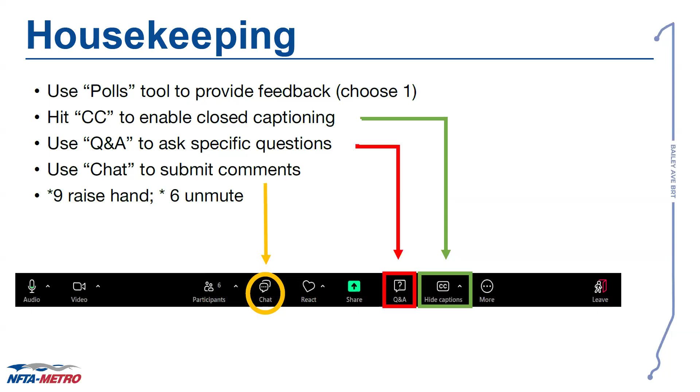So the first thing we have is our first poll: have you been engaged by NFTA about the Bailey Avenue Bus Rapid Transit project before? Below you can see the options. Yes, I received a mailing. Yes, I met an ambassador. Yes, I attended an open house in February. Yes, I heard NFTA present at a community meeting. Yes, I went to the event on June 11th. Yes, more than one of the above. And no, this is my first interaction related to Bailey Avenue BRT.

And we will post that right now. Is everybody seeing it on their screen? Great. In a minute, we will end the poll and give you a little bit to respond. So far, we have 3 people responding. So we ask that you take a look up on your screen and click the most likely option.

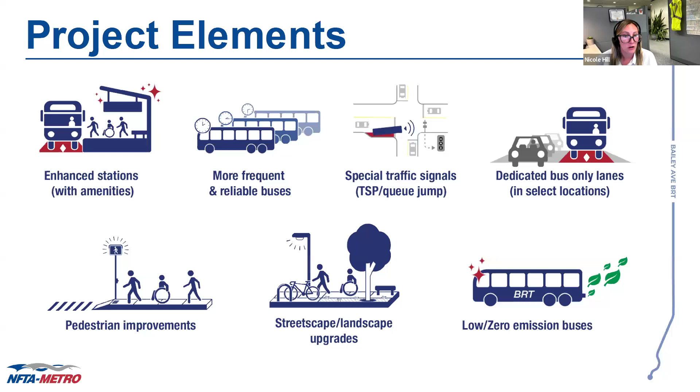The Bailey Avenue Bus Rapid Transit Project and the associated improvements to sidewalks, traffic signals, and the roadway will provide better transit service and repair public infrastructure in ways that will support further investment in the communities along the corridor. Next slide, please.

Over the past year, the NFTA and the team of consultants have conducted the final steps in the planning process before we can begin engineering for the project. Here's a brief overview of what we did, which includes these prior studies. So these prior studies were done previously before this project was built out.

These efforts included Buffalo Billion's East Side Corridor Economic Development Fund by Empire State Development, the Bailey Avenue Corridor Improvement Study, the City of Buffalo's Build Back Bailey project, and the GBNRTC's Moving Forward 2050 update, which serves as the region's metropolitan transportation plan. These studies generally focus on developing solutions to address disinvestment and improve transportation in and around Buffalo's east side. The results and outcomes of these studies have helped inform the Bailey Avenue Bus Rapid Transit project. Next slide, please.

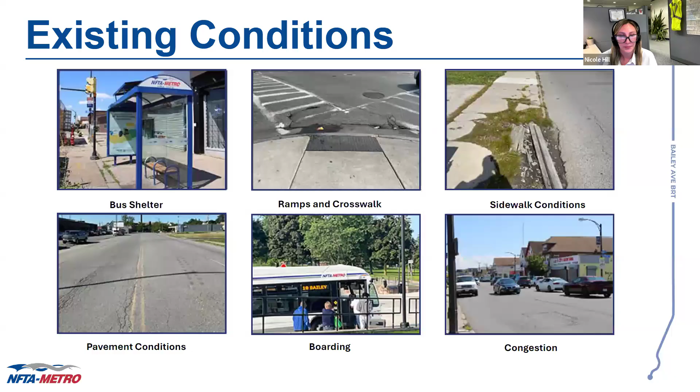Our team couldn't just rely on the work of others, therefore, existing physical and operational conditions throughout the corridor were assessed as part of this project. Elements like sidewalks, bus facilities, curb ramps, crosswalks, congestion, sidewalk, and pavement condition were cataloged and analyzed to better understand the needs within Bailey Avenue and the study area and what improvements were needed in the corridor. Here are some example pictures of some of the existing conditions along Bailey Avenue. Next slide, please.

In addition to this prior planning work, the NFTA project team conducted some other analysis to confirm some of the assumptions from those prior studies. This included a crash analysis to identify intersections with higher numbers of crashes, traffic analysis to make sure that improvements would make the buses faster without having too great of an impact on congestion, a ridership analysis to make sure that BRT stations are going at the right locations, and a special analysis to determine how much energy is needed to charge the buses and what that would mean to the schedules.

The results of these analyses and meetings were critical in advancing the project, including informing the conceptual design of BRT stations. The project team used special traffic models to analyze these impacts with the proposed new lane geometry, which would be needed to implement the BRT service. The team looked at all vehicles and bus travel in both the northbound and southbound direction at AM and PM peaks.

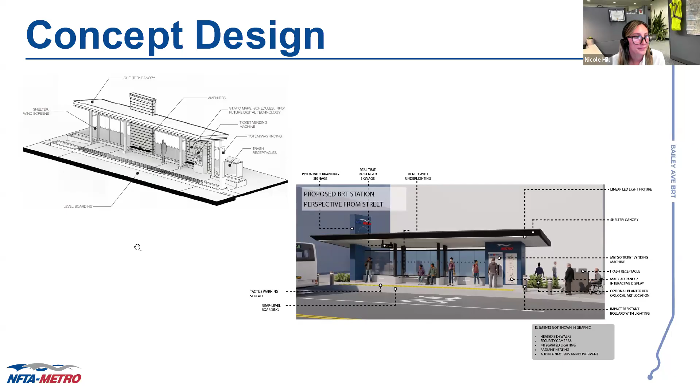Engagement is one of the most important parts of this project. The NFTA is dedicated to ensuring that everyone has the opportunity to be part of this project, especially those who may have been excluded in previous efforts. NFTA created a public participation plan to help guide all aspects of engagement and community involvement.

The public participation plan is used to target different types of engagement activities, which include meetings with stakeholder groups, tablings, attending community events, and developing various digitalized materials, which you can see on our website if you would like to visit that. The project team has been working on engagement efforts since the summer of 2024, including a variety of in-person activities. This includes over 40 tabling and pop-up events, 15 community meetings, and 6 key stakeholder groups.

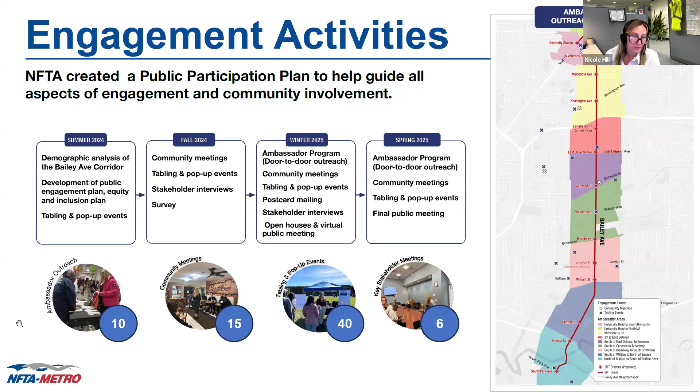NFTA previously launched an online survey towards the end of last year. The purpose of the survey was to assess community needs and desires related to the Bailey Avenue BRT project. The top 3 improvements for Bailey Avenue identified by survey respondents were faster buses, calmer traffic, and more buses.

After analyzing all of this survey data, the 4 major themes found were that community members wanted greater bus frequency, a safer corridor, infrastructure improvements, and improvements to the cleanliness and comfort. The results from this survey were used to inform the conceptual design of the Bailey Avenue Bus Rapid Transit project and reaffirmed that the community desires identified in past studies were still being felt. Next slide, please.

Hi, everyone. Again, I'm Nadine Chalmers. I'm the manager of planning here at NFTA, and I'm going to go through the next 10 or so slides that define the Bailey Avenue Bus Rapid Transit project going forward. So the purpose of all that review and analysis and engagement that Nicole talked about was to define the project, right? What does BRT on Bailey Avenue mean? What does it look like? And that's exactly what we've done over the past year or so is define the project.

After today's meeting, and after we receive comments by July 7th, we will be moving into the next phase of the project, which is engineering. And in the engineering phase, basically what we do is we fill in all the details required to construct and run this service. So in the next 10 minutes or so, I'm going to tell you exactly how the project stands, and I'm going to cover 3 major categories: BRT stations, transit priority elements, and street and sidewalk improvements. Next slide.

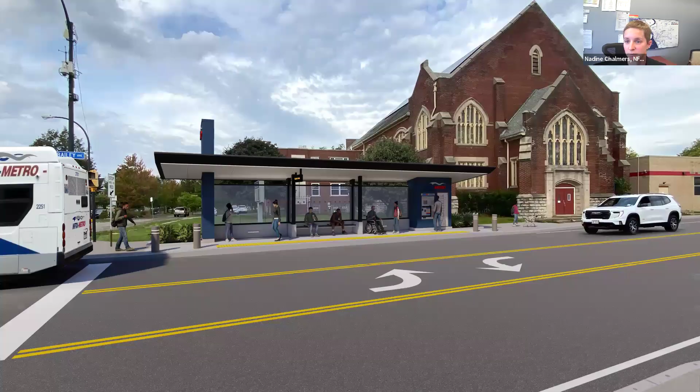So this slide lists all of the important elements that we have selected to be part of the BRT stations. And then I'm actually going to go to the next slide because it's more exciting because it actually shows all of this equipment that you're going to be seeing at BRT stations. So this is a new rendering of the southbound station at Minnesota Avenue. So we're kind of looking west right now towards the southbound station. So this is what the stations are going to look like.

And you can see that we're planning to have seating, weather protection. You can see there's a Metgo machine there, so people will be able to buy their passes before they get on the bus, which makes it a lot faster to load everyone onto the bus. You can see a hint of a digital sign there at the top of the station, and that digital sign will tell you when the next bus is coming.

Things that you can't see in this photo, but that we are planning to include in the station are heating elements, right, up in the ceiling to take the edge off that winter chill, and also heated sidewalks below to help minimize the buildup of snow and ice.

And you can also see in the rendering, the curb comes up in the station area. So the purpose of elevating the curb and the platform is to make it easier to get on the bus. It's called near level boarding. So you don't have as big of a step up when you get on the bus. Next slide.

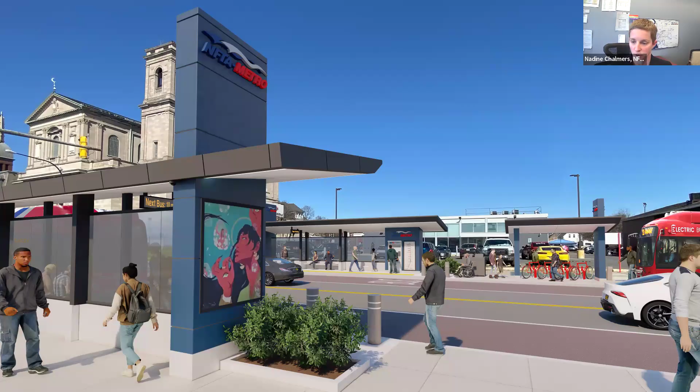So this rendering is at the future Delavan station, and we're looking east right now. So we're mostly east and a little bit north. You can see that church, the mosque to the north there. So here, this is a different view of the station. You can sort of see the side and back of the shelter. And you can see we've included an overhang so that you could wait on both sides of the shelter there, depending on how many people are there, or if it's windy in a certain direction.

You can also see we're including an opportunity for public art there, and that's just a sample print, but each station will have a space to include public art. You can also see plantings there. Across the street, you can see trash cans. So these are all features that the community asked for, especially the public art opportunity and the trash bin. So we're excited to be including those.

Also across the street here, you can see a mobility hub. And a mobility hub is basically an add-on to the BRT station that invites connections to other modes of transportation. So in this mobility hub, we're featuring bike share, Reddy Bikes. You can see the red bikes there. So the idea is that someone might take a Reddy Bike, park it at the BRT station, and get on the bus. And we're planning to include mobility hubs at 8 of the 13 BRT stations, including South Park, Seneca, Broadway, Walden, Genesee, Langfield, and University. Next slide.

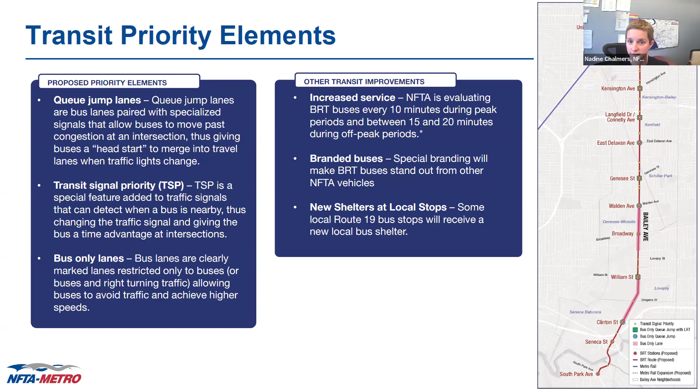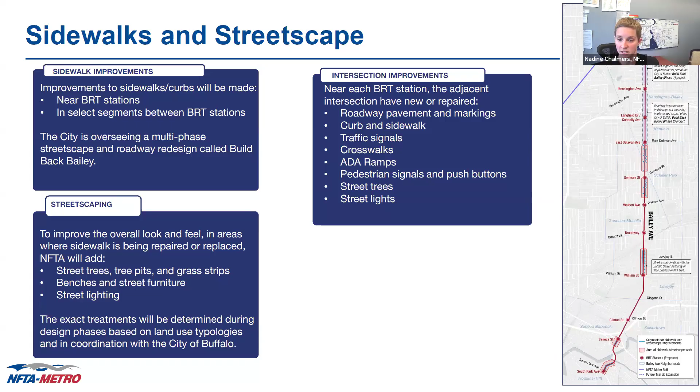But in between BRT stations, we're also able to make some streetscape improvements, which I know is also badly needed. So in partnership with the city of Buffalo, we're planning to replace certain sections of sidewalk and to upgrade those sidewalk areas with things like trees, benches, new lighting. And at this point, it's looking like approximately 2.5 miles of Bailey Avenue in between stations will see new sidewalks and all of the benefits that come with that, including street trees, lighting, and similar. So around 2.5 of the 7.5 mile corridor in between stations, we'll get a whole new streetscape. Next slide.

All right, so this graphic basically sums up the Bailey Avenue Bus Rapid Transit project as it stands. And this is the project that will be shortly headed over to engineering. So again, we're planning 13 stations with well-lit heated shelters, real-time travel information, heated sidewalks, unique branding, and an opportunity for public art. 8 of those 13 stations will have a mobility hub with opportunities for bike parking, bike sharing, and any other mobility options that may become available in the city of Buffalo before launch. We're going to have 4 queue jump lanes and 3 bus lane segments.

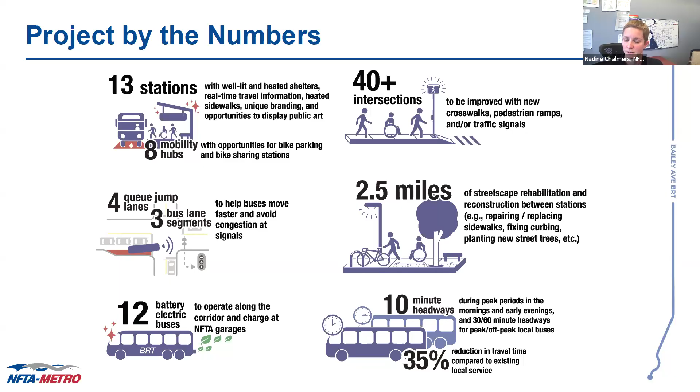So we're going to hand it back to Highland for some polls. Thank you, Nadine. So poll number 2, which part of the project is the most exciting to you? Is it the BRT stations or the mobility hubs? Intersection improvements, transit priority elements, more frequent bus service, sidewalks, or the streetscape? So we'll post that poll, and if you could take your time to fill that out.

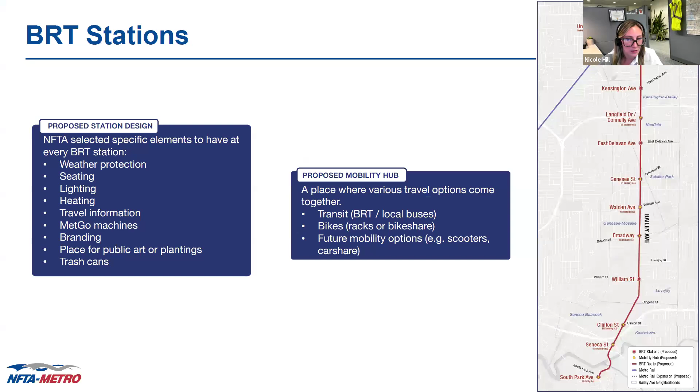All right, another one. Will the light be delayed for private vehicles compared to how it is to allow the bus to pass through for queue jumping? That's a great question, Samuel. Leanne, I'm not sure if you want to backtrack to one of the slides we showed on, I think it was slide 12, that shows the analysis that was done, which ultimately resulted in showing that even with the queue jumps and TSP, there would be very minimum impacts to personal automobiles. So at maximum, there would be a 3-minute delay during the southbound PM peak periods. So ultimately, there would be very little interference with the existing automobile traffic.

It looks like Hayden has a follow-up question. The 19 will service more stops along the route, correct? Or both will service the exact same stops? To clarify, the 19 will have a reduced number of stops along the corridor, just because the BRT will also be servicing the same intersections that the local 19 has traditionally been stopping at. We're still developing which stops will remain based off of our service plan and what makes both modes of buses communicate and work with each other.

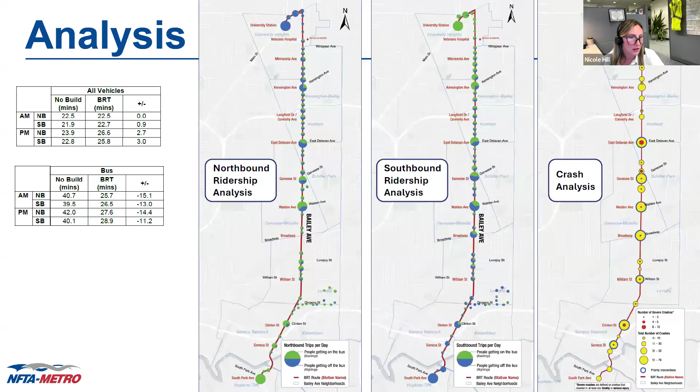Going back to the question from Nina, can you explain the 3-minute delay in more detail? Is that 3 minutes at one lane? Is it based on traveling a certain distance along the corridor? Like that's this 3-minute right here. Okay, yes. So that 3 minutes is, I believe, for the entirety of the corridor. Michael, do you want to confirm the parameters of that? Correct. That's 3 minutes. Both the max time savings and the additional time are end to end. So most people will not be traveling the entirety of the corridor, and so will not see that delay.

Equally, someone had asked the question around the time savings. I don't have access right now to the modeled segments. Certain segments will see greater time savings for the bus than others, but the entire time savings end to end will be 15 minutes, which in some segments could still be 2 to 3 minutes, especially in areas where the queue jump lanes are expected to have real benefit, or in segments where there are bus only lanes and getting through some congested intersections, let's say in the southern parts of the corridor.

And while you're on, Michael, this might be another question for you. Question in the Q&A: I'm curious how other cities have seen success with the special signals for the buses. I feel like cars would be confused. Have other cities used the signal successfully? And I see you answered the question, but perhaps others might want to hear it as well.

Sure. Yeah. So there's plenty of precedents of bus only signals. These signals that Nadine had shown you will be at William northbound. They'll be at Genesee southbound, Kensington southbound. And unfortunately, I'm drawing a blank on one of the other locations. But the point is that they are in use in Troy, Schenectady, and Albany. They're in use in New York City. They're in use in parts of the lower Hudson Valley.

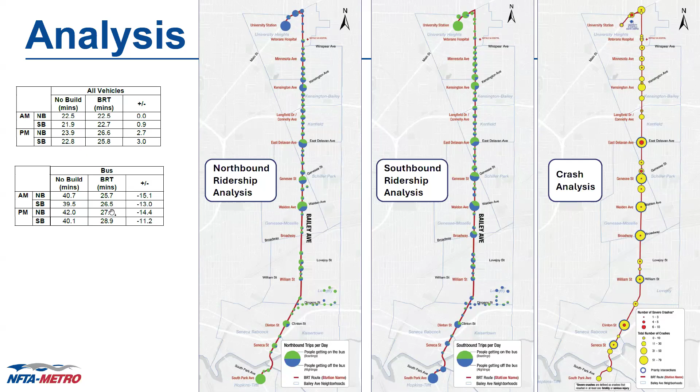So if you pulled up there and right turns are allowed, you can turn right. If you're sitting behind that bus, the bus is going to get through that intersection fairly quickly. They'll still have to stop to let people on and off, but then it'll get the special signal and pull through. And once it pulls through, a regular vehicle will be able to turn right from that lane. So long way of trying to answer your question, but they do work successfully. And as I said, NFTA is working to make sure the community is aware of these, and we'll work with the City of Buffalo and other partners to make sure everybody kind of knows what bus-only signals are and what queue jump lanes are.

All right, you want me to keep going? There's a couple more under the Q&A.

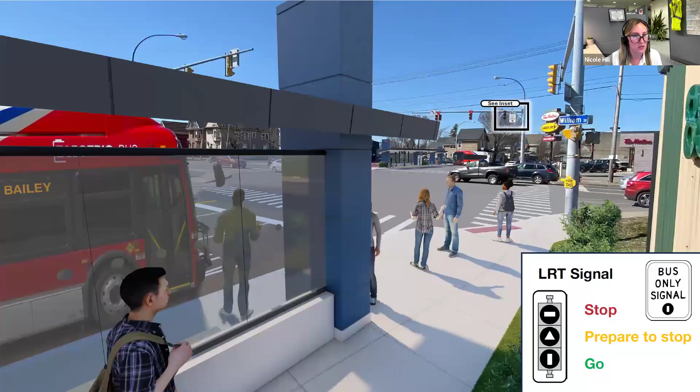In several cities, BRT stations are in the middle of the road, but it seems many of yours are on the side of the road. What was the thinking on this? I can take that question. So ideally, there's two ways of doing BRT stations. That's either center running, which is what you've seen maybe in other cities, and then side running, which we have determined as the best option for Bailey Avenue. And that's based on the existing right of way and width of Bailey Avenue. So we didn't want to make any substantial impacts to any of the existing infrastructure. So we were working within the bounds of Bailey Avenue, and that's why we decided to do side running BRT stations.

Sorry, I apologize, I was muted. Is the construction of these hubs going to affect the bus route and traffic during that time? I can also answer this question. So during construction, obviously there's going to be some sort of impact as we will be doing some repaving and restriping of the road. However, we're going to be working with the community and the public to make sure those impacts do not affect the existing Local 19 route. So for example, while we're working on one section, we may push the bus stop down a couple of feet or so as we're finalizing that. There's other strategies in which we could be implementing mitigation to the construction of this project. And so anybody who's going to be impacted, we're going to be communicating with in the future once we have our construction plan finalized.